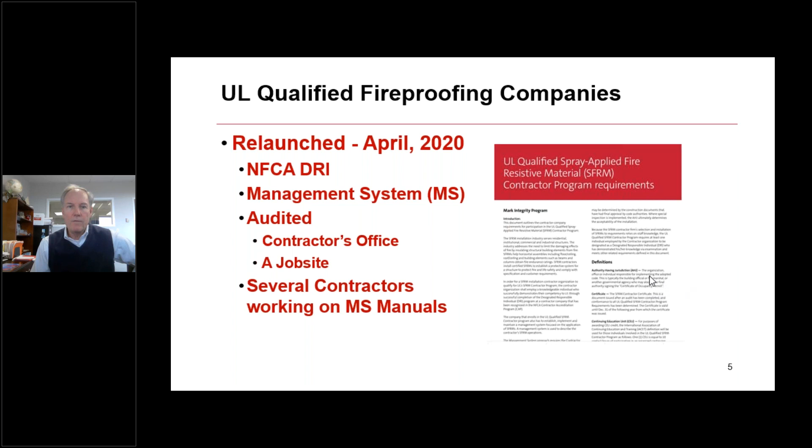The UL Qualified Fireproofing Contractor Program, the NFCA worked with UL to relaunch this right at the beginning of COVID, actually, if you think about it. April of 2020 is when we relaunched this. Contractors are in the queue, and there's a bunch of companies about ready to get qualified, and we look for that program to take off over the next several years.

The NFCA's Handbook of Accepted Fireproofing Knowledge supports the exams, the NFCA fireproofing exams for IFRM and SFRM. It's fireproofing all in one place. Great book. Rich Walke was a big help, helping me get it over the top and finished. We had developed a lot of the book, and over a period of, I don't know, 3-4 months, Rich and I were able to make it a public document and finish things off.

Moving on, our education exams continue at NFCA. We've got virtual education exams taking place November 9 to 11. So if you want to get educated and take the NFCA fireproofing exam, which is the first step to become a UL qualified fireproofing contractor, or the NFCA accredited fireproofing contractor. You know, that NFCA accredited fireproofing contractor program is the first step to get yourself to the UL program. Got to be a DRI. The only way you can be a DRI is if that NFCA accredited contractor company appoints you as such. So November 9 to 11, we'll be doing the education exams, and then we'll do them live at our NFCA Week of Learning in the spring of 2023.

Our Award of Excellence takes place at the conference next year. January 31 of 2023 is our deadline for the Award of Excellence. Look for more information on that to come in November, December as well.

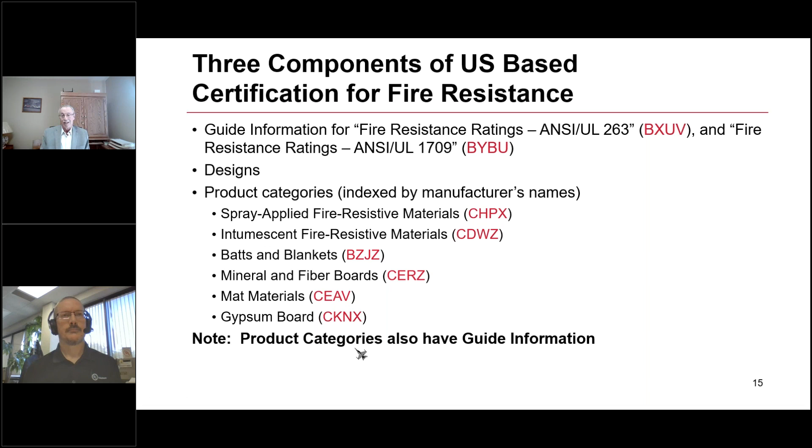And then when we come to Canadian certifications, we likewise have a series of product categories, each of which is described by a name and then the category control number. For the most part, the names of those product categories will end with the phrase certified for Canada to very clearly identify the fact these are certifications based on Canadian codes and Canadian standards. So anytime you see that phrase, it is purely Canadian work intended for use in Canada. The CCNs for Canada will end in either a 7 or a C.

You're probably asking, why do we have two suffixes for the Canadian work? Well, the categories which end in the number 7 are categories, listings, and certifications which are published by UL Solutions, I guess I'll say the parent company of UL. The categories that end in the letter C are published by Underwriters Laboratories of Canada, which is a Canadian affiliate of UL.

So at some point in time, those categories will be merged. UL has not yet got to that point of doing that, but in reality, either of the categories, the 7 categories or the C categories, relate to certifications intended for Canada. First case with a 7, those are certifications from UL, typically referred to as CUL listings, and those ending in the letter C are UL of Canada listings. So likewise with the various product categories, they'll either end with the 7 or the C suffix.

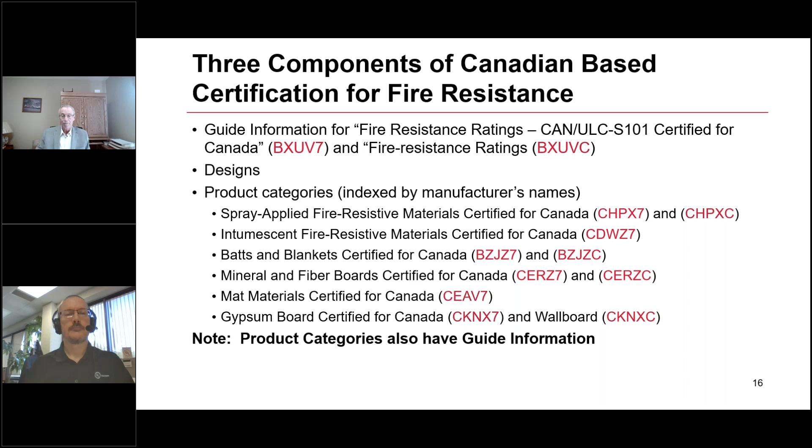So let's talk about each of those individual components of the certification information at this point. The guide information is our primary focus here today, and more specifically the guide information relating to BXUV fire resistance ratings to ANSI UL 263. And the guide information for BXUV is probably, if not the most complete guide information published by UL. Many, many pages long, lots of very informative information.

We used to have an index of that guide information, and there were something like 95 individual topics covered by this guide information. So it is imperative that you know the guide information is there, and you know how to use that information and how we use it in conjunction with the use of the individual designs. So in general terms, the guide information starts with the equipment, materials, and systems included in the category. And that applies across the board regardless of what the category is. Most of the time, the guide information will start with a sentence, this product category covers such and such. Very easy to understand whether you're in the right category just by reading that first line.

And then it includes intended uses, restrictions, and supplemental information that apply. And that's where BXUV is really useful. It contains pages and pages and items of intended uses, restrictions, and supplemental information. All the guide information also gives the standard by which those products are evaluated. That way you have a very quick way of keying in: are the listings I'm looking at appropriate for what I'm trying to do at this point in time?

So then, of course, each individual UL design is a specific construction which covers certain construction features and ultimately concludes with, if you build this assembly as described in the design, this is the hourly rating that you would achieve. And most all of the designs do have multiple options, so you do need to read all those options, all those variations. Sometimes those variations will impact the ratings, sometimes they won't, but you need to read that design carefully. And in case of direct applied fire resistant type materials, those designs will give you the thickness that's required for the required hourly rating for your project.

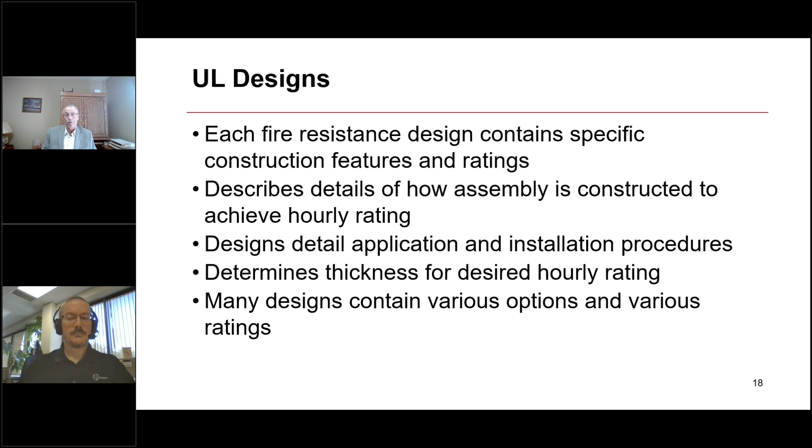And again, most designs contain a number of options and various ratings, so you need to read it carefully to understand exactly what that specific design is covering. And most UL designs are intended for a particular manufacturer. Not always. There are a lot of designs that do include multiple manufacturers. The UL designs are not interchangeable between products unless specifically noted in the design.

You can't take desirable features from one design, combine them with desirable features of another design, and come up with your hybrid. That sort of process is not allowed. You're required to use those designs as published. And there are a number of modifications that are permitted by the guide information. Those are permitted.

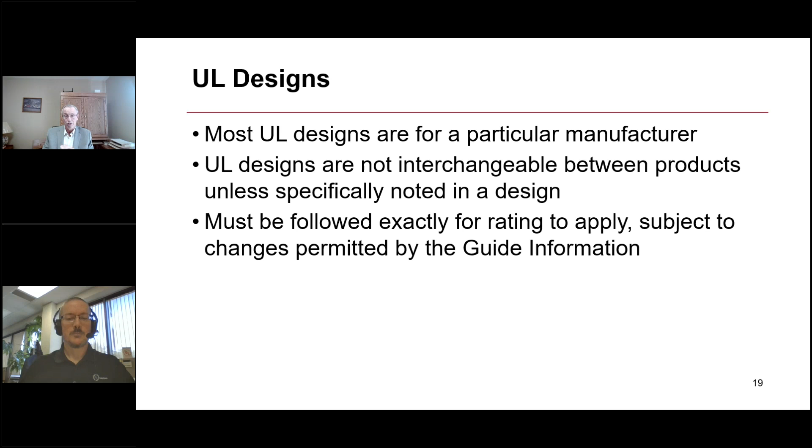And the classic example I always give in that particular case is, and perhaps doesn't pertain to your industry, but for example, if you're looking at a design that covers a gypsum board wood stud wall assembly, and the design says the wall is to be constructed of 2x4s, can you construct it with 2x6s? Well, by the design, the answer is no. But if you go over to the guide information, it will state that the stud size specified in the design is a minimum, and anything larger can be used. So that's a classic example of how the guide information can be used to modify the specific requirements of an individual design.

And of course, those designs are published under the UL Product IQ online directory, accessible through www.ul.com/PIQ. And Kevin will be talking more about that in a couple of minutes.

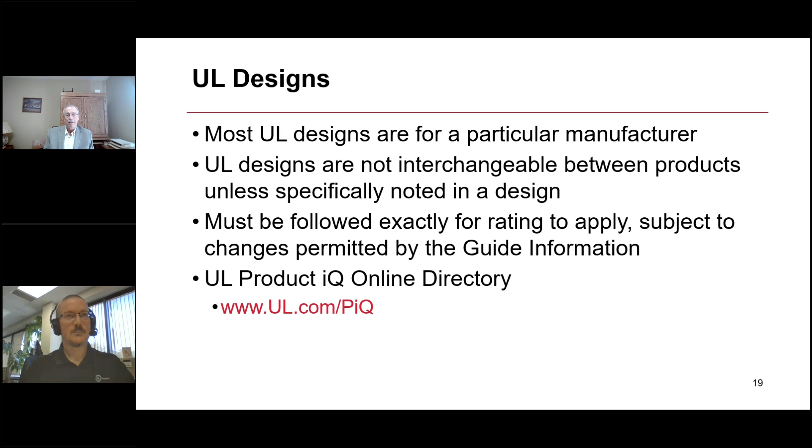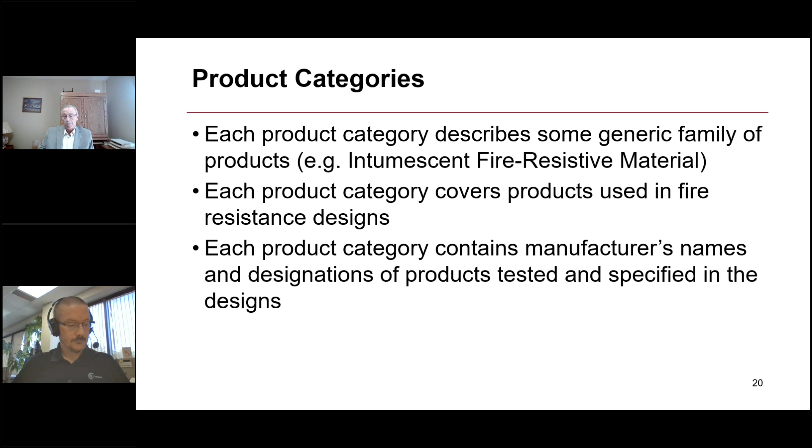And then the individual product categories describe some generic family of products, for example, intumescent fire-resistive materials. And then within that product category, we will have some guide information which pertains to the use of intumescent fire-resistant materials. And then it will cover the individual manufacturers who produce products that are certified by UL for use in these designs. And each product category will contain the name of the manufacturers and the designations of the products that have been tested, and then either the designs that those products can be used with, or some parameters by which that product can be used in conjunction with the designs. So a couple different formats there depending on the specific product category.

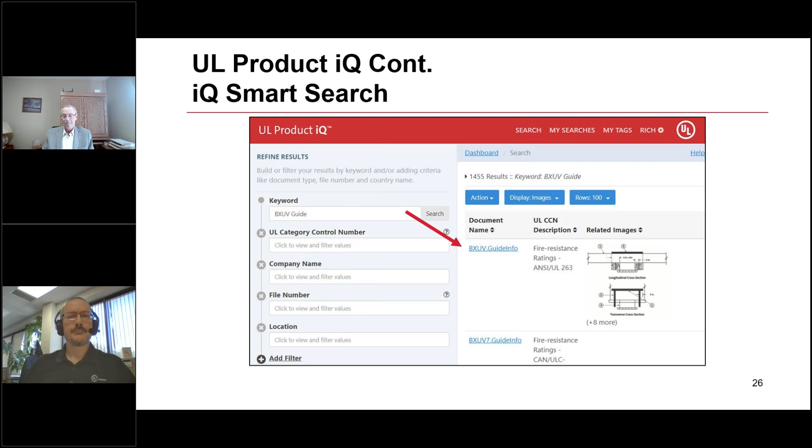And the next slide, yeah, here, this is what you'll see, the BXUV guide info. This is the most looked at thing on Product IQ. On all of Product IQ, this is the most looked at thing. I liken this to sort of not quite a building code, but as Rich described it, you can work with this BXUV guide and the designs to know what variations you can make or cannot make. It is the most looked at thing. If you pasted this into a Word document, it's 50 pages of text, so it's quite a bit of text. So next slide, please.

And maybe, Kevin, can I introduce one other comment? Sure, go ahead. The very first item of the BXUV guide is a table of contents of what is contained here. And these are links. So if you just click on any of those topics, it will take you directly to the page of the BXUV guide that discusses that particular topic. So it's a very useful tool for getting to what you specifically need. Otherwise, if you're trying to page through 50 pages of information, you would find it very difficult to find what you're looking for. Okay, go ahead, Kevin. Yep.

And yeah, so there's six main topics in the BXUV guide, one being introduction, two general stuff that applies to every type of assembly, whether it's a floor, beam, column, or wall, that would be in general. And then information that's specific to certain assemblies would be found under those assemblies, section 3, 4, 5, or 6. You go to the next slide. So in section 1, there is a table that gives letters and numbers. It gives an explanation of the design numbers, such as a wall design like U305. It tells you what those letters and numbers mean.

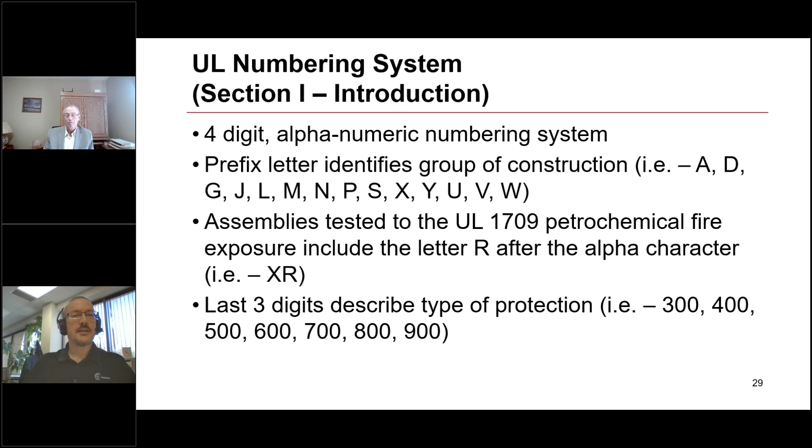Next slide, please. Okay, and as I mentioned, each of those letters signifies what type of assembly it is. So if the design starts with the letter N, that's a beam for a floor. If it's a wall, it would start with the letter U, V, or W, and so on. Next slide, please.

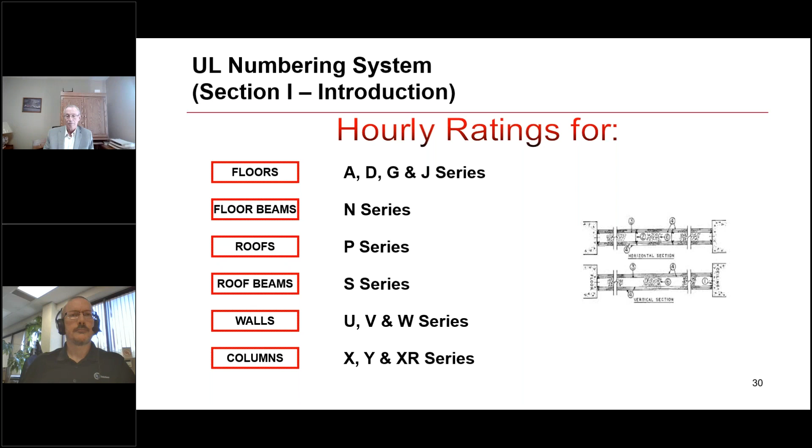And as I mentioned, the first character is the letter, and then the next 3 characters are numerical. There's 3 numbers. So if it's U300, actually, if it's a 600 series, it would be an intumescent coating. 700 or 800 series, it would be an SFRM. And the 900 series means it's an unprotected assembly. So those last 3 characters, the numbers, refer to the protection material.

Yeah, next slide. When Kevin says the 800 series, that really means design numbers 801 through 899. So it's a series of designs. Correct, thank you, Rich. So here are some examples spelled out. D700: that D refers to a floor, 700 refers to an SFRM. P800: P refers to a roof assembly, and the 800 again refers to an SFRM. And then the last example here, X600: the X refers to a column, and the 600 series, 601 through 699, means it's an intumescent fire resistive coating.

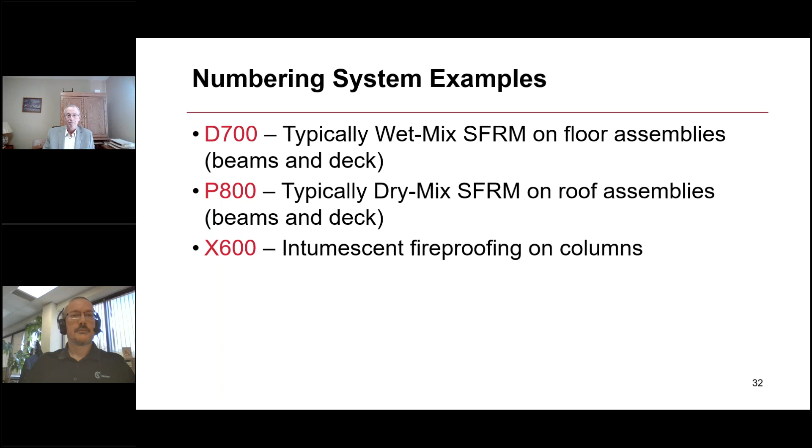So go to the next slide. Okay, Rich, back to you. Okay, great. Thank you, Kevin. Great job.

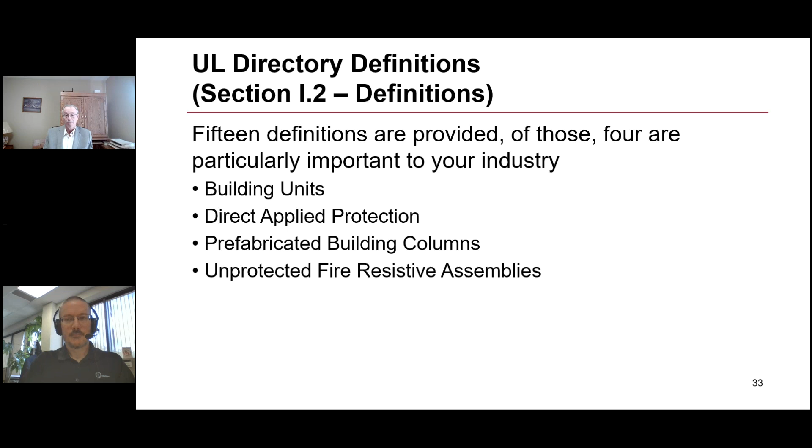So I'm going to continue talking about the information in the guide. This particular piece of information is found in section Roman numeral 1, the introductory information, and then the 2 refers to the fact it's the second item or paragraph within that introductory information. So you can always reference the pieces of information in the guide based on that table that Kevin showed you earlier. In reality, there are a number of definitions in the guide that pertain to fire resistance, and 4 of those are particularly important to your industry: building units, direct applied protection, prefabricated building columns, and unprotected assemblies. So let's look at those definitions.

A building unit is simply a particular type of product covered by a product category called building units, and typically it's some sort of manufactured composite panel product providing some sort of fire resistance rating. And then direct applied protection, folks are probably very familiar with that, but it describes various types of fire resistant materials, including sprayed, intumescent, mastic, and subliming type materials applied directly to the construction. For example, directly to the bottom of the steel deck, directly to the beams, etc. So that's the key. They're directly applied to the structure itself.

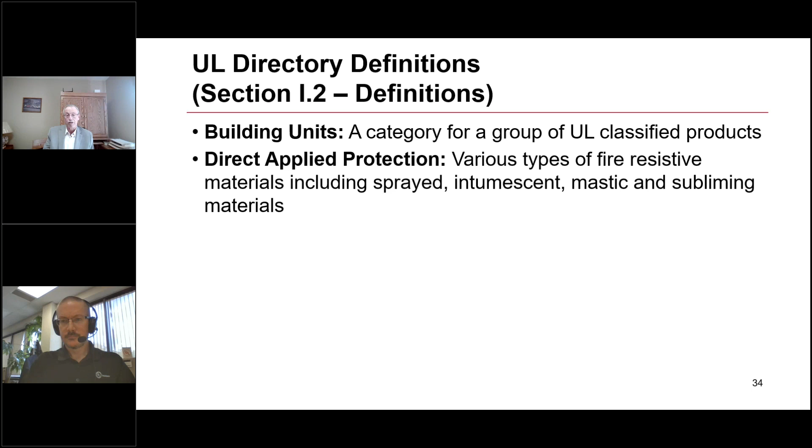And then we have prefabricated building columns, and those are structural building columns that include a fire resistant protection system when delivered to the construction site. For years, UL had a couple of designs that show a concrete encased column with a light gauge steel wrapping around it. I never knew too much about those products. They existed when I came into the fire resistance group at UL in 1987, but I actually ran across the manufacturer of those products recently, and they're out there in the field actively promoting that type of construction. So anyway, those are prefabricated building columns.

And then we have an unprotected fire resistive assembly. Now, that is perhaps a bit of a misnomer, because obviously we need some sort of protection on these assemblies in order to achieve the rating. What that's really referring to is assemblies where there is no direct applied coating or suspended ceiling to protect the general floor area or roof area of that assembly. Even though it's referred to as an unprotected assembly, typically those assemblies will have some sort of protection applied to the structural elements, the beams, joists, and so on, in most cases some sort of direct applied material. But the bottom line is that unprotected refers to the protection on the deck itself.

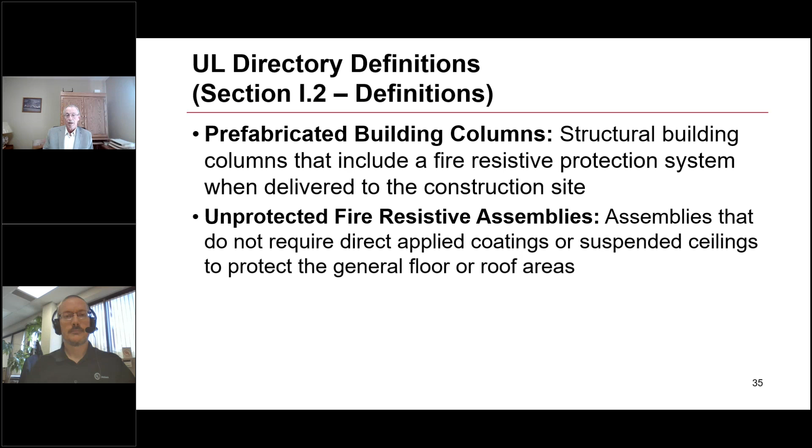And now moving on to section 2, or Roman numeral 2, that covers general information that's applicable to all of the various designs. And there's several pieces of information that would be important to you folks. One of them is reference to interior and exterior applications. And then the next would be information about the coating materials, both the spray applied fire resistant materials and intumescent fire resistant materials. Now, UL refers to the sprayed materials as spray applied fire resistant materials.

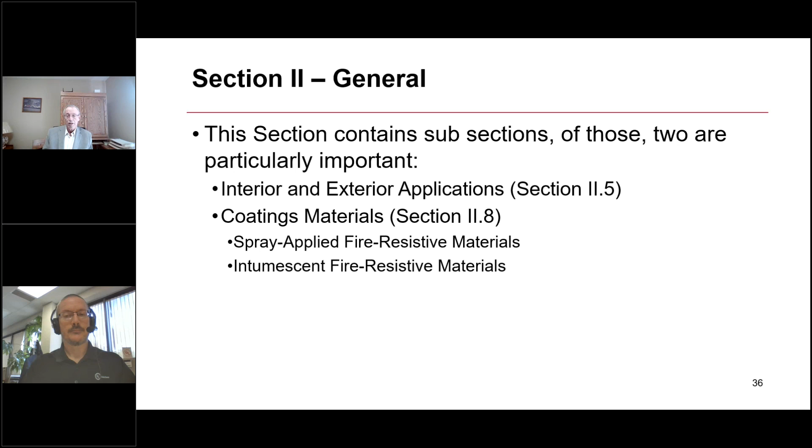So your industry typically uses the phrase sprayed fire resistant materials. And Bill and I were also successful in getting ICC's International Building Code updated to reference these as sprayed fire resistant materials. So now Bill and I are working with Kevin to get the UL listings updated to also use that industry terminology of sprayed fire resistant materials. So that will happen at some point in the future. So anyway, let's look at the interior and exterior applications.

Again, that's covered under Roman numeral 2, general, and then item number 5 under Roman numeral 2. So basically what this says is the fire resistant designs and certified materials are investigated with the understanding their use is limited to interior applications unless otherwise specified in the design or certification information. And typically the form that reference will follow is the phrase investigated for exterior use in conjunction with the description of the specific product that was used to provide the protection. So list the manufacturer, the designation of the product, along with that phrase investigated for exterior use.

What that implies is that UL has done a series of tests to evaluate that material will still provide its fire resistant performance after exposed to various elements that would be anticipated in an exterior application. The UL guide information also at one point in time used to contain a phrase, or unless otherwise obvious. For example, let's say we're looking at a wall assembly or a roof assembly, and that wall assembly contains exterior siding products on the exterior side of that wall. Is that design acceptable for use as an exterior wall? Realistically, the answer is yes. Otherwise, it wouldn't reference the exterior siding, for example.

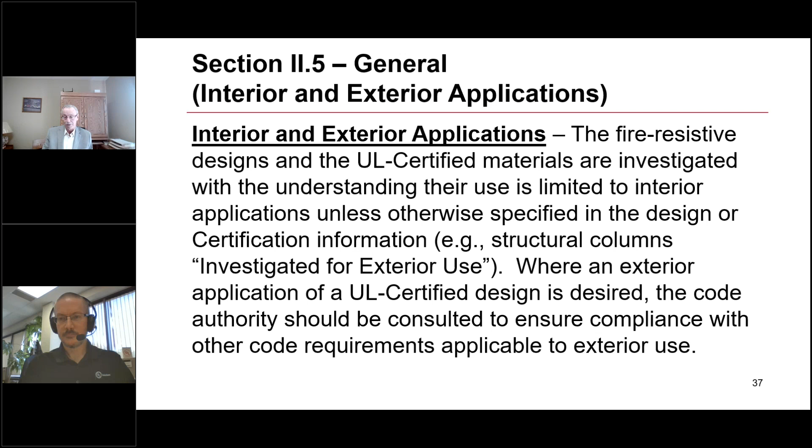So next item we'll want to talk about is covered under Roman numeral 2, general, item number 8, and that covers coating materials, your typical spray applied fire resistant materials and intumescent fire resistant materials. And one of the big topics under that section is how do we address the situation where you have an unknown primer applied to the structural steel. So the question has always been, will the sprayed fire resistant materials adhere to that unknown primer? And this was a huge deal when I first came into the UL Fire Resistance Group in 1987, and the industry was struggling on how to address this issue.

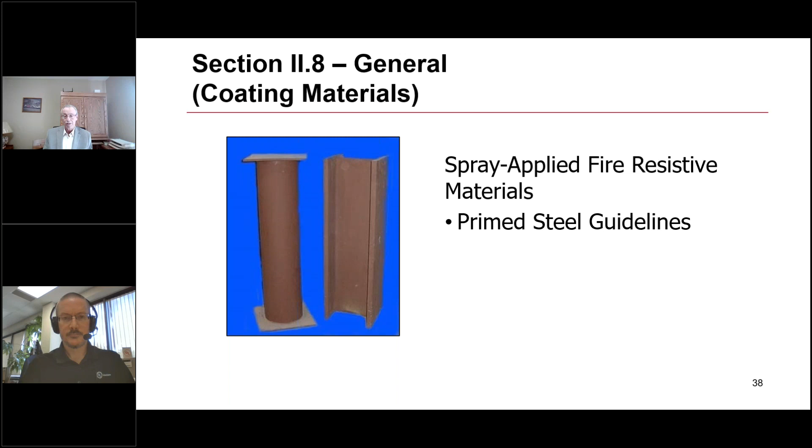So UL hosted a series of task group meetings with the manufacturers of the sprayed fire resistant materials, along with the manufacturers of the coating materials, and put together the thought processes and did a little bit of research, and ultimately came up with a series of guidelines on how to address that situation where, as a contractor, you show up in the field and you find that the steel is primed. You have no idea what that primer is. You have no idea whether your sprayed material you're going to be using will adhere to that primer. So you scratch your head like this gentleman's doing and say, now what do I do?

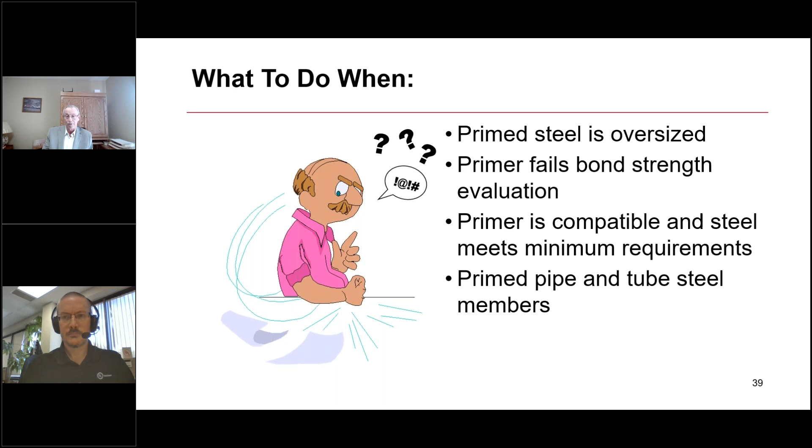What do you do when that primed steel is oversized? What if you fail a bond strength test? There's a whole series of rules and requirements that come into play here, which I'll explain as we go along. But one of the requirements says that if the size of the structural element is small, relatively speaking, then the material itself will adhere to itself and have enough cohesion strength that it will stay in place even if it loses some of its bond strength adherence to the steel. So the requirements really relate to what is the size of the structural steel elements.

And for a beam, the limitation is the flange width shall not exceed 12 inches. For a column, that flange width shall not exceed 16 inches. And then for a column or a beam, the web depth shall not exceed 16 inches.

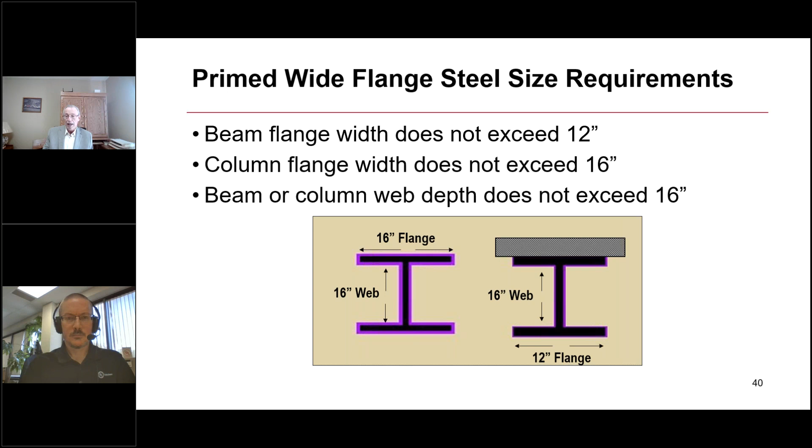And there's an added bond strength requirement also, but we'll get to that one in a minute. If the size of your steel members is larger than those dimensions I just gave you, then it's required that the structural element be protected with strips of lath or studs and discs applied to the structural member for a minimum of 25% of the size of the oversized flange or web. That lath width shall not be less than 3.5 inches, and that lath needs to be welded, screwed, or attached with powder-actuated fasteners at a maximum of 12-inch centers to the structural element.

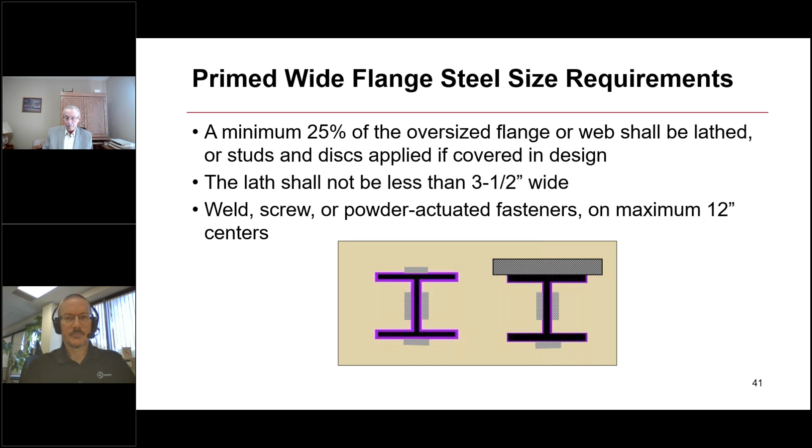So basically, you're providing a mechanical bond within that oversized dimension to provide some adherence for the spray-applied fire resistant materials. And if you have a tube, steel, or pipe, the dimensions would be for a tube width that does not exceed 12 inches, and a pipe outer diameter that does not exceed 12 inches.

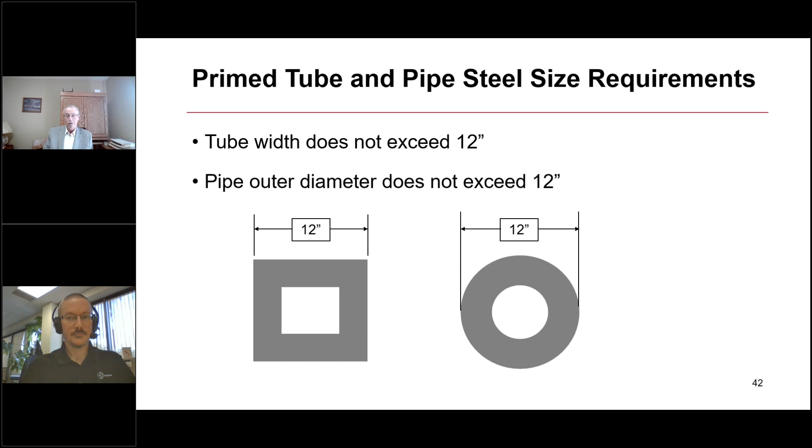What happens if it does exceed those dimensions? Well, then you need to apply again the lath or the studs and discs to provide that mechanical adherence of the fireproofing material to the structural elements. And once again, the width of that lath strip shall be no less than 3.5 inches, and the clear span of the pipe or tube shall not exceed 12 inches.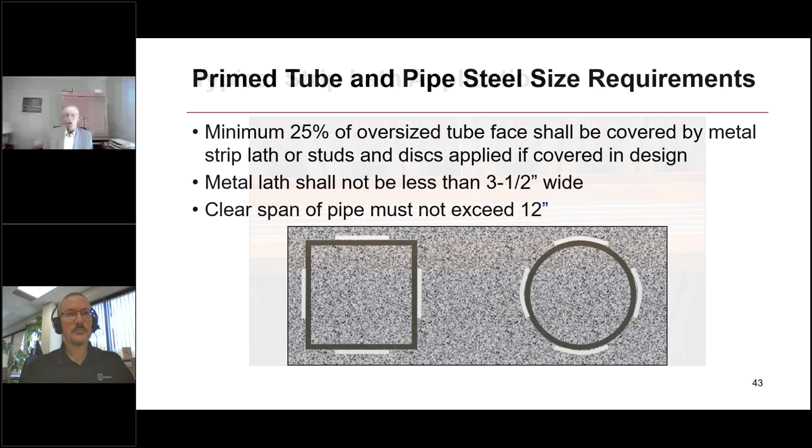So here's a photo of an application of lath. In this particular case, this beam was oversized, and as such, lath was required. Strips of lath have been applied to the web section, and that provides adherence for the fireproofing. Now, the second requirement to use hand in hand with those dimensions that we've just gone over is a bond strength test.

If you have an unknown primer, you need to conduct bond strength tests of the spray-applied material as applied to that primed steel. The results of testing in accordance with ASTM E736 should indicate a minimum average bond strength of 80% and a minimum individual bond strength of 50% when compared to the bond strength of that same material applied to a clean, uncoated 1/8-inch thick steel plate. In other words, a control sample. The average and minimum bond strength values shall be determined based upon a minimum of 5 bond strength tests.

Now, if you do not meet your bond strength requirements of 50% and 80%, then you can use a bonding agent to meet that requirement. If you meet the strength requirements with the bonding agent, then you're good to go. If it's not met, even with that bonding agent, then you need to provide a mechanical bond by wrapping the entire outside perimeter of the structural element with an expanded metal lath. The guide information will give you more details on how to do that, the specifications on the metal lath, and so on and so forth.

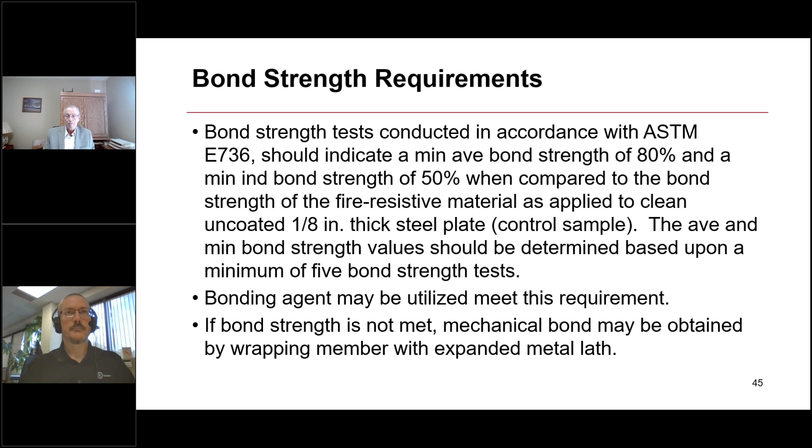So at this point in time, I'm going to turn the floor over to Kevin, and Kevin is going to talk about intumescent fire-resistant materials. So go ahead, Kevin. All right. Thanks, Rich. You can go to the next slide.

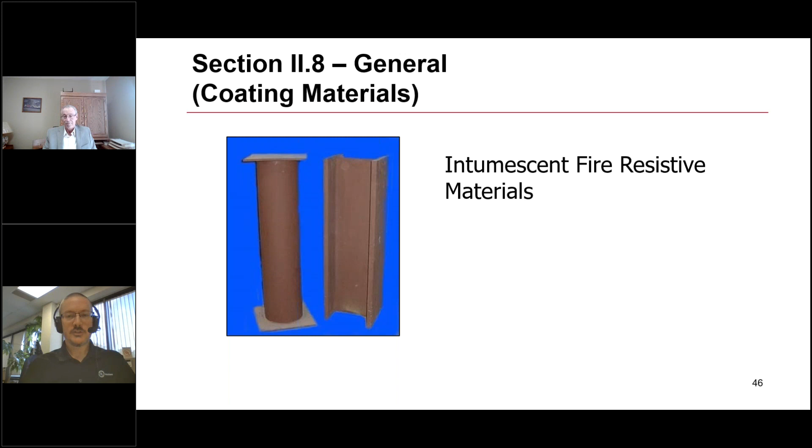So there it talks about thickness, how to measure the thickness, and determine the right thickness on the column or beam, the structural member in the field. When we test columns and beams in the lab, maybe on a 9-foot column or a 13-foot long beam, we take maybe 80 or 100 readings here in the lab to ensure that that coating thickness is uniform, so we know what we're testing. But do you have to measure it that many times in the field?

No. So the BXUV guide says, for the thickness that's in those designs, the column design or the beam design, use the AWCI Technical Manual 12B, standard practice for the testing and inspection of field-applied thin film intumescent fire resistant materials. In there, there's a method, I think it's based on the total square area at the job site, for how many readings to take. So that's what the guide information says about the thickness that's published in the design. Use the AWCI manual to determine how many readings to take at the actual job site to ensure that the right thickness of intumescent material is on the column or beam.

Another important point with intumescent materials, the guide says you cannot extrapolate the element size, the beam or column size, or the material thickness. Next slide, please.

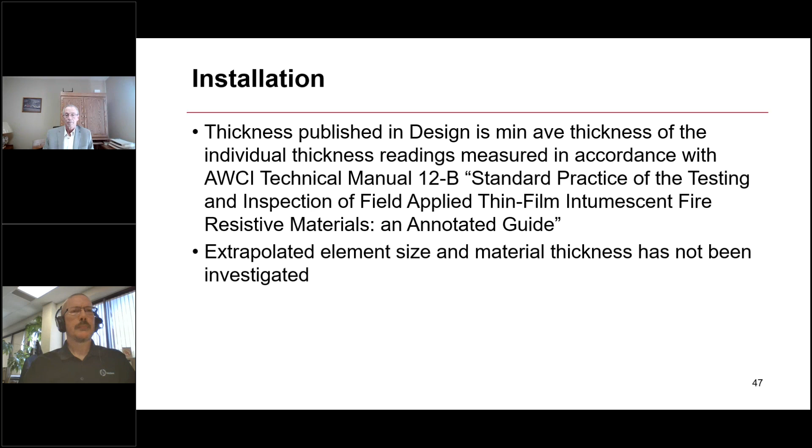Okay, and part of the reason for that last statement and then this next one up here is with intumescent coatings, how they perform. They form when those thin paint coatings see fire, see heat at a certain temperature, the coating starts to expand and form a char, an insulating char, and that's what protects the steel beam, the steel column. It insulates it from the fire, keeps the steel temperatures low up to a certain point.

But what can happen with intumescent coatings, you might think, oh, the more material I put on, the better. Well, some coatings might have a limitation that if you put more of the material on than what is tested, that might actually be bad, because if that char gets too big or too much, gravity then might come in and actually start to pull that off, and you might have a lower rating than what you originally had with that lesser thickness. So that's why that previous statement says do not extrapolate the thicknesses.

And then here it says the average thickness should not exceed the maximum thickness published in the individual design. What that means is that the maximum thickness in that individual design is the maximum thickness that we have a test data point on, so do not exceed that. And then at the other end, you don't want to go too low, so it says no individual thickness measurement should be less than 80% of the thickness specified in the design. So you really need to be close to what the thickness is stated in the design.

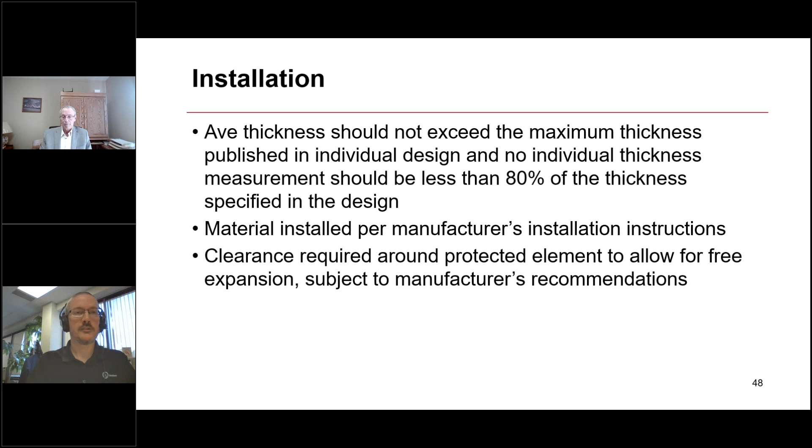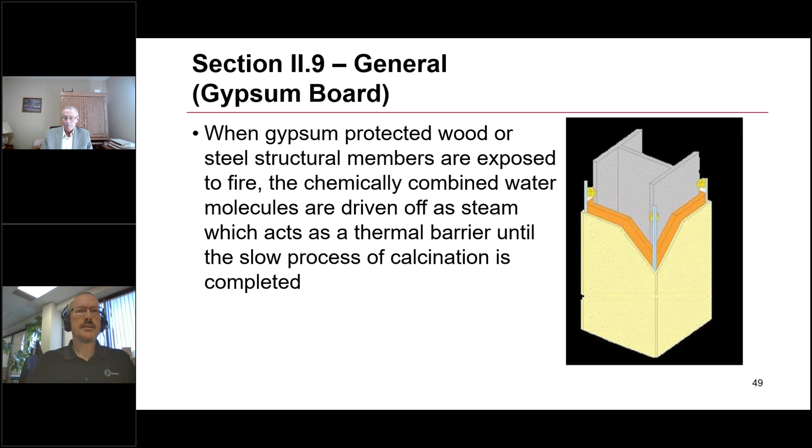Okay, next, section 2.9 talks about gypsum board. Gypsum board is also a very good fire-resistant material when it's used on wood or structural steel members and it's exposed to fire. There's chemically, water is in the gypsum board in a chemical crystal form that when the fire or heat hits that gypsum board, the fire and heat first go to driving that water out as steam. So then the gypsum board acts as a thermal barrier until that process, that it's called calcination, until that process is completed.

Kevin, before you go ahead, I'll just say that I once did some calculations, just a little piece of trivia. Each 4x8 sheet of 5/8 inch thick gypsum board contains 1.86 gallons of chemically bound water. Hard to imagine, but that's what the numbers work out to be. Go ahead, Kevin. How long did it take you to do that calc, Rich? 30 seconds. Really? Okay, cool.

All right. Okay. So there's kind of like two general types of gypsum board, type X and type C. We'll first talk about type X. It was introduced in the 1950s. What does type X mean? Where is that defined? That's defined in an ASTM standard C1396.

And one of the definitions for type X says that if you take 2x4 wood studs and put one layer of 5/8 gypsum board on either side of that wood stud, there's a certain nail pattern, certain type of nail, and you subject that to the UL 263 ASTM E119 fire test, and if that achieves a 1 hour rating, then that 5/8 board can be called type X. Its primary use is in walls, used in 1 through 4 layers.

It is in some ceiling designs, but typically you cannot put insulation on top or on the back of the gypsum board in the ceiling plenum, because under fire conditions, the heat's on the underside of that ceiling, and if you have insulation on top of the board, that's kind of trapping the heat there, and it will accelerate that calcination process, that degradation process. So there's some limitations to the performance of type X boards. All right, next slide.

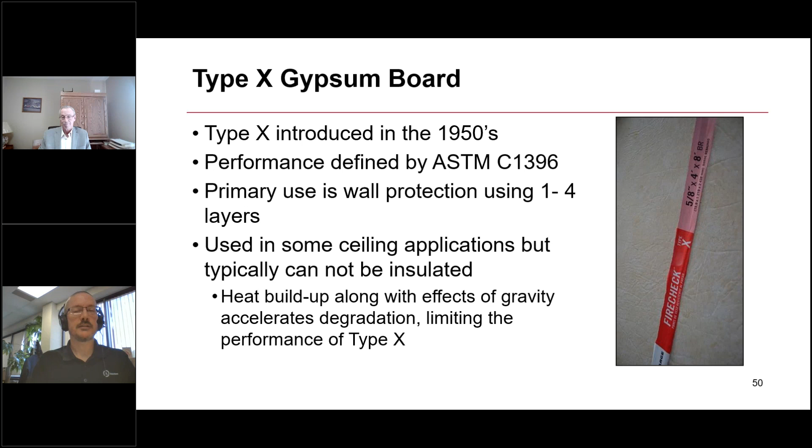All right, thank you. And then the other type is type C gypsum board. That's not really defined anywhere in the ASTM. Maybe someday it will, but it was first introduced by USG in the early 1960s, and then later on in the 1980s, other manufacturers started making their own version of a Type C board.

What makes it different than Type X board is Type C boards contain a special core formulation that compensates for the shrinkage, that calcination that we're talking about. There's some special ingredients there that make up for that to reduce the effects of shrinkage. This board has become the norm for many column, beam, roof, and floor ceiling assemblies. What you just have to do is look in each design, and it will state the manufacturer and type of board, type designation, model name of the board allowed in that design.

A very common misapplication of this is if the design calls for a Type C board and a Type X board is actually used. That would not be allowed unless that Type X board is specified in the design. And the reason for that is, as we're showing on the screen here, the Type C boards tend to perform better because of that different core formulation, different weight. So if Type C board is the only type specified in the design, that is the one that you have to use.

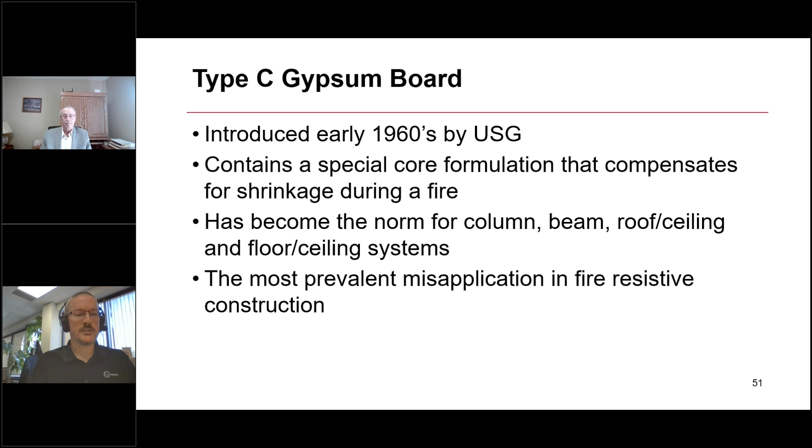Okay, next slide. Okay, and then maybe the last thing in this section, general, I think Rich mentioned this earlier. This is stated at the very top of the BXUV guide. Fire resistance ratings apply only to assemblies in their entirety. You're not really allowed, other than beam substitution, which Rich will talk about in a bit. Other than that, you can't look at one design and move something from that design over to another.

Another thing, what this means is that no specific material in the design has a rating. Like there's really no such thing as 1 hour rated gypsum board or 1 hour rated plaster or a fire rated nail. Although those things might be tested in a fire resistance assembly, and are a part of that, the rating applies only to the assembly, not the individual materials. Okay, next slide.

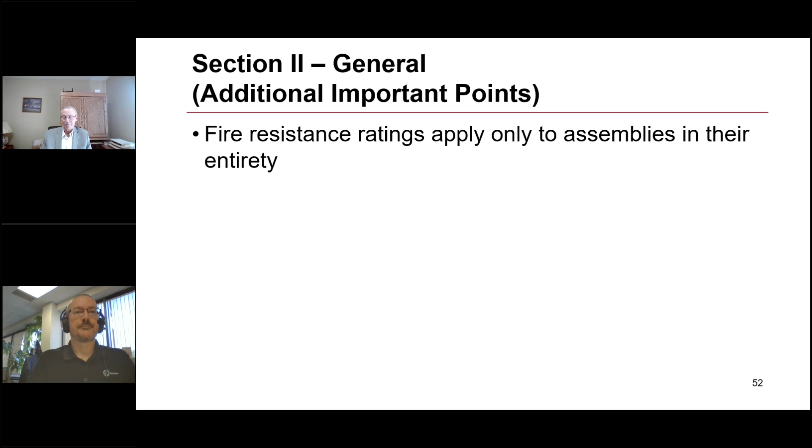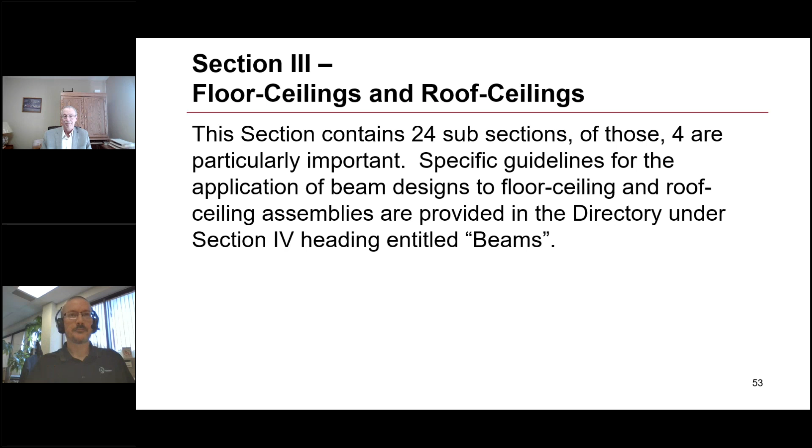Okay, so let's move on to section 3 for floor and roof ceilings. This has 24 subsections, and we'll talk about 4 of those. You can go to the next one, Rich. Okay, so those 4 we'll hit on today are concrete, steel floor and form units or steel deck, steel joists, and the deep end of the pool, restrained and unrestrained assemblies. Next slide, Rich.

Okay, what the BXUV guide talks about concrete, section 3.1, it makes a general reference that there's 2 types of concrete in all the designs, normal weight and lightweight concrete, kind of defined by the densities there, normal weight having the higher density, lightweight having a density there of 90 to 120 pounds per cubic foot. So each design will state a minimum compressive strength, and generally that's the compressive strength of the concrete that was used in that fire test. And there is some data to show that the compressive strength is somewhat tied to the hourly rating. So that's why it's specified there.

But the BXUV guide does allow a little bit of tolerance there. It says you can reduce that concrete compressive strength that's specified in the design by 500 PSI to obtain the minimum value. Also, the dry unit density of the concrete is also specified in the design. Again, that's linked with the fire resistance rating thermally, and the BXUV guide. Sometimes the engineer might have just put a number in there as a density, and what the BXUV guide is saying, that number has a tolerance of 3 PCF unless the design states otherwise.

And then the last thing is key. Sometimes the design will have normal weight and lightweight concrete and specify what thickness is needed for either one. But if the design only has lightweight concrete, you cannot just interchange that with normal weight concrete because they behave differently. Normal weight concrete in a fire test acts as a heat sink, kind of absorbs the heat, and lightweight concrete in a test tends to reflect the heat. So if this concrete is on top of a beam, that will cause the temperatures on the top flange of that beam to react differently depending on which type is there. So when lightweight concrete is specified, the use of normal weight is not allowed, and also vice versa. If normal weight concrete is the only one specified, you cannot use lightweight concrete.

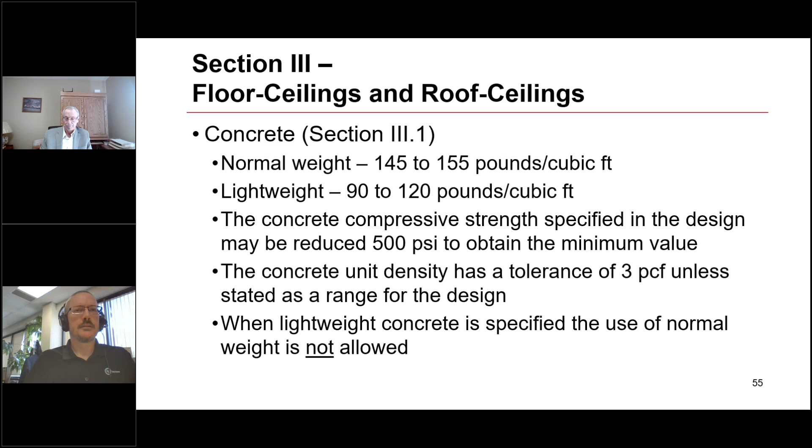All right, so that's concrete. Next slide, Rich. All right, steel floor and form units are just steel deck.

Key thing here is that the type of unit and the minimum steel thickness are specified in each design. So there's quite a few different types of deck. There's roof deck, there's corrugated deck, fluted deck, cellular deck. Again, if the design calls for fluted deck, but the builder wants to use cellular deck, there's some implications with that.

Again, with that top flange of that beam, when you have cellular deck, then there's no access to that top flange to protect that. So will that heat up faster? So you have to pay attention to the design, and whatever type of deck is called out, you have to use that. All right, next slide, Rich.

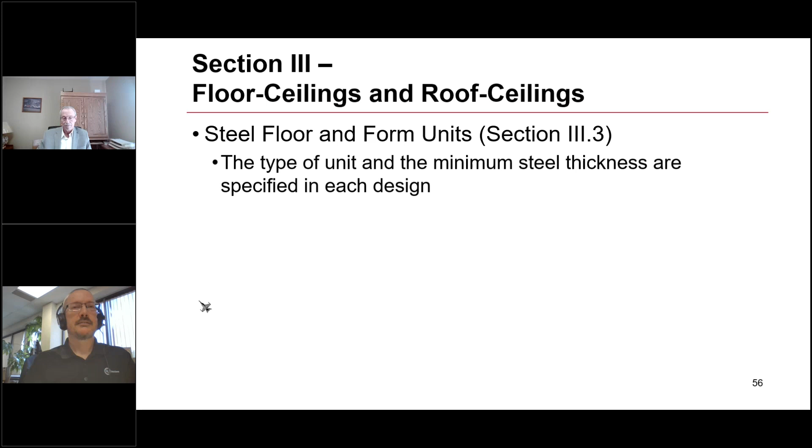Not sure why that's not advancing. Okay, the next one should be steel joists. There we go.

Okay, section 3.7 is about steel joists. Some designs will call out a specific type, like a 10K1 joist. That would be the minimum size, but other designs give a minimum depth and a minimum weight per foot. So what this is saying here is that is considered the minimum size. You can use that size or anything larger when you consider both the depth and the minimum weight per foot. That's based on the mass of the steel, which we'll get into in a little bit.

Also with steel joists, for designs that require the bottom chords of the joist to consist of round bars, the substitution of angles of an equivalent area is not permitted. I think the reason for that is that bottom chord might be the one seeing the most stress, because these tests are loaded. The standard says you have to build these full scale and subject them to a load if it's a load bearing assembly. So anything with the joist is a load bearing assembly. And when you load that, that stress, I think, is mostly picked up by that bottom chord. So that's why that statement is there, that you can't substitute that.

And then also when the design calls for bridging bars or angles for the joists, and those joists have SFRM on them, if those joists are protected, you also have to put that protection material on those bridging bars and angles 12 inches beyond the joist. Next slide, Rich.

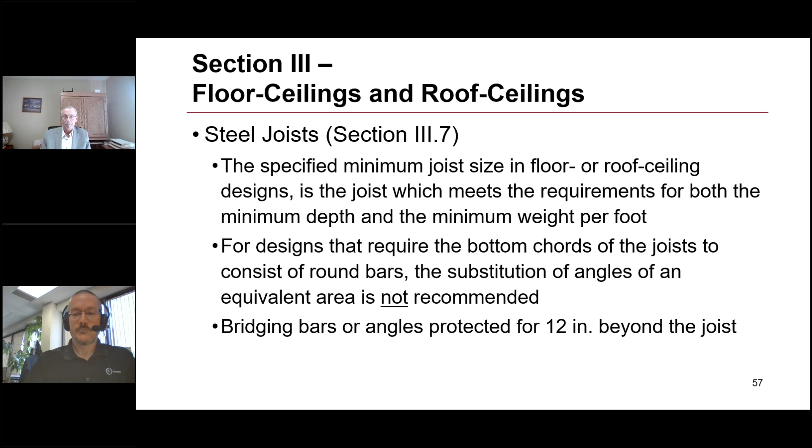Okay, restrained and unrestrained ratings. All right, the deep end of the fire resistance pool. So the guide information says that it's up to the designer and the code authority to determine if the assembly is restrained or unrestrained. Each design has restrained and unrestrained thicknesses in them in general, and it's tied to certain ratings. So what's to decide which one you use, restrained or unrestrained? The BXUV guide says it's up to the designer or the code authority to determine if the assembly in the field is restrained or unrestrained. If that's unknown or undetermined, the BXUV guide also says the unrestrained assembly ratings, because those conditions are more onerous. The unrestrained assembly rating may be used for either the restrained or unrestrained condition.

Next slide, please. Kevin, let me add one more point too. The International Building Code also has requirements for the decision on restrained versus unrestrained. The code basically says that unrestrained ratings are to be utilized unless satisfactory information is provided to the code authority to demonstrate that the assembly qualifies for a restrained rating in accordance with ASTM E119 or UL 263. So that puts the responsibility on a design professional to provide the evidence to the code official that the assembly is in fact restrained or not.

Okay, and to determine that, there's generally two ways to do that. The first one says that the structural engineer, the engineer of record, can calculate the relative stiffness of the surrounding structure and compare that to the stiffness of the UL test frame. That's the concrete and steel frames that we have here in our lab that floors and beams are tested in. So someone years ago did a calculation on these test frames. They're all built the same way. I think we've had them since the 50s and 60s, the same ones. We published that as a point of comparison. So the stiffness numbers are in the BXUV guide.

So if that calculated stiffness is greater than the stiffness of the UL test frame, that can be considered restrained. But if that calculated thickness, stiffness is less than those numbers in the BXUV guide, it is considered unrestrained. That's the first way. The other way is in UL 263 and ASTM E119 and also the BXUV guide, they all contain pretty much the same table that has given construction parameters, conditions for floors, for beams, etc. And if you look up what type of construction you have or what situation you have, what's the surrounding structure, it'll tell you if that is restrained or unrestrained.

Okay, great. Thank you, Kevin. And so I'm going to talk about the differentiation between beam ratings versus assembly ratings. And UL does publish two series of beam designs, beams intended for floor applications and beams intended for roof applications. And there's two purposes of those designs, the N series for floors, S series for roofs.

And the first application is where the code only requires a rating on the structural member. And certainly there are applications where that is the case, or sometimes there's applications where the code has a longer rating requirement for the beams and joists as compared to the rating of the overall assembly. And in that case, we can use the beam designs to replace the beam that is specified in the fire resistance rated floor ceiling or roof ceiling. For example, if you have a 2-hour assembly rating in that floor ceiling or roof ceiling design, and the code says we need a 3-hour beam with a 2-hour floor rating, we can replace that beam specified in the floor ceiling or roof ceiling assembly with a beam only design that has a 3-hour rating.

So there's some rules and methods by which we can make those substitutions. We need to follow those rules very carefully. And they're another one of those difficult concepts perhaps to follow, like restrained versus unrestrained. But in any case, I'll give you some of the guidance on how to make that substitution. And the guide information also says beams need to be defined based on the W, M or S-shaped structural steel as defined by AISC. And section 4, the guide information, item 1, talks about the minimum beam size is always defined by W/D ratio.

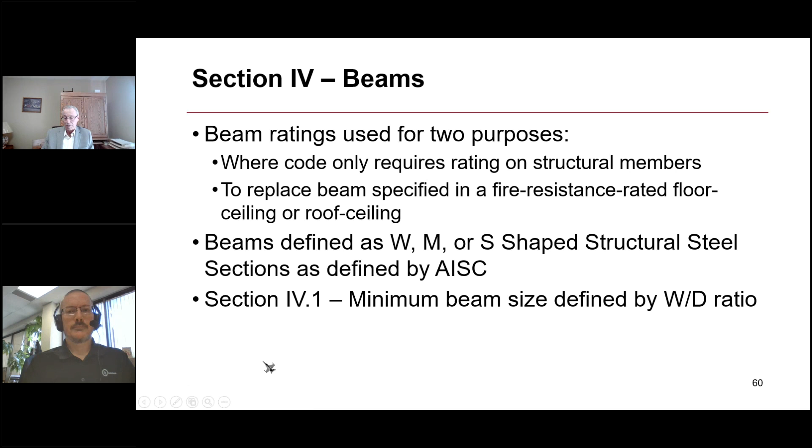And basically, W/D defines the massivity of that piece of steel. In other words, how much weight it has per unit length based on the heated perimeter. W is the weight, D is that heated perimeter factor. So each size beam has, or column for that matter, also has a specific W/D number associated with it.

Now, when you're using beams in conjunction with steel deck floor assemblies, then you have that cavity that is created above the top flange of the beam and beneath the steel deck, that trapezoidal shaped cavity, and that needs to be protected in some way, shape, or form. It's basically protected in one of two ways, either based on the use of the sprayed fire resistant material that's being applied to the beam and/or the deck, or you can use that same fire-resistant material in conjunction with the mineral wool. And the guide gives a couple different ways by which to do that.

So if the flange width is less than 8 inches, you fill the entire width of the flange with either spray applied material or spray applied material in conjunction with mineral wool. If the flange width is greater than 8 inches, then you can protect it for a depth of 4 inches from each of the two sides of that beam. So that's covered in detail in the guide information. And then we have those beam substitution procedures, which I talked about before. And again, the N series designs cover beams only, and those beams are intended for use with floor assemblies. Those floor beams can be substituted into the specific A, D, G, or J series floor ceiling assemblies, subject to a very specific set of rules.

And overall, one of those rules is the beam rating of the N series design must be equal to or greater than the assembly rating of the floor ceiling assembly. Obviously, if the floor ceiling assembly is rated for 3 hours, the beam is rated for 2 hours, it's not going to work. The beam is going to lose its structural integrity, causing the overall assembly to lose its structural integrity also. So the beam rating always has to be equal or greater than the assembly rating. Likewise, if you're dealing with roof assemblies, you can substitute an S series design for the specific beam covered in the P series roof ceiling designs. Again, subject to that rule where the rating of the S series beams should be equal or greater than the assembly rating of the roof assembly.

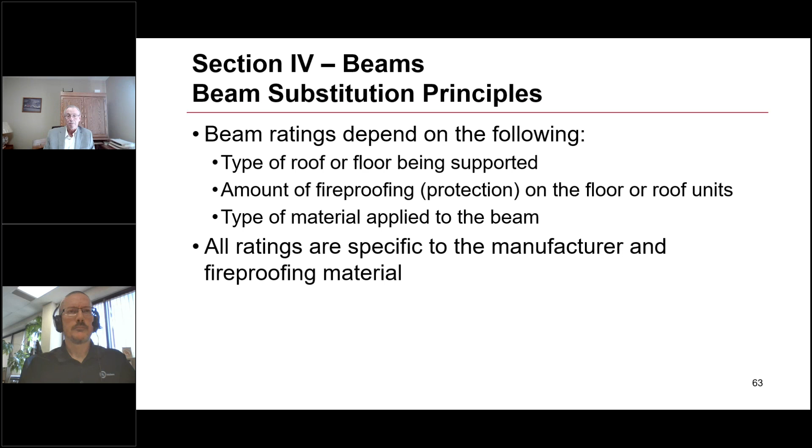And continuing on, the substitution really relates to the type of roof or floor being supported, the amount of fireproofing or protection on the floor or roof units, and the type of material applied to the beam. And all ratings are specific to the manufacturer and the fireproofing materials. So the UL guide information has some requirements for that beam substitution.

And one of the requirements is the substitution of beams into a floor or roof assembly should be limited to assemblies which have a similar or greater capacity for heat dissipation from the beam as compared to the capacity of the design from which the beam is transferred. In other words, you need to have more heat capacity in the assembly as compared to the beam only design.

And the idea behind that is, the concrete acts as a heat sink. It keeps the top flange of the beam cooler. So the more concrete you have, the better that beam is going to perform and the longer its rating is going to be. So you're limited to substituting that beam only design into assemblies which have a greater or equal capacity for heat dissipation. And I'm calling this a beam substitution rule, but in reality, that rule applies to not only beams, but also joists and trusses.

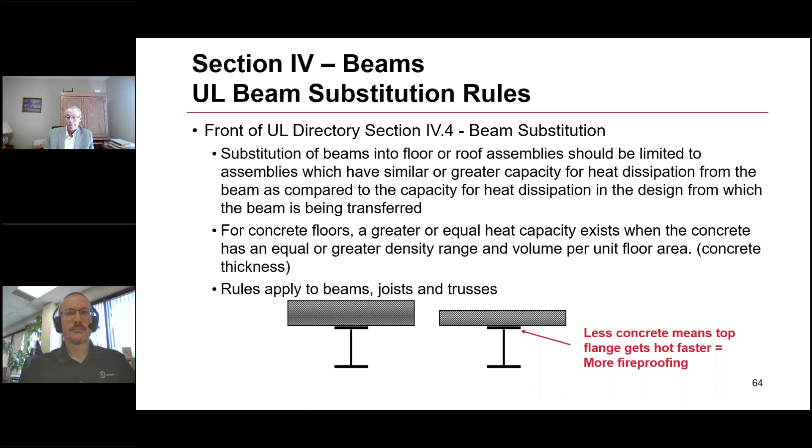And again, less concrete on the top of that flange means the flange gets hotter quicker, and as such, the beam would require more fireproofing material to reach a particular rating period. So here's a series of graphical representations of how we can make those substitutions. And this information comes directly from the NFCA Handbook of Fireproofing Knowledge. That manual has a very detailed description of the processes that I am describing now. These illustrations are coming from that document.

So after the webinar, if you want to get more details, strongly suggest you go to the handbook and review that in more detail. It'll provide more information than we can provide in a 1-hour webinar. So let's look at those substitutions. On the left-hand column, I have the full construction assembly. In other words, the P design, the floor assembly is either an A, D, G, or J series. And on the right, we have those partial construction beam only designs. The handbook calls these things partial constructions. UL calls them beam only designs, but they're all one and the same.

So the first item, can you substitute an S series beam only design into a P series roof assembly? The answer is yes, you can. Can you substitute an N series design into an A, D, G, or J series floor ceiling assembly? Yes, likewise you can. Can you take a beam from a P-series overall assembly rating, substitute it and create an S-series design? No, that wouldn't be appropriate, nor would it realistically ever be necessary. Likewise, for the floor beams, you can't create a floor beam design based on your floor assembly rating.

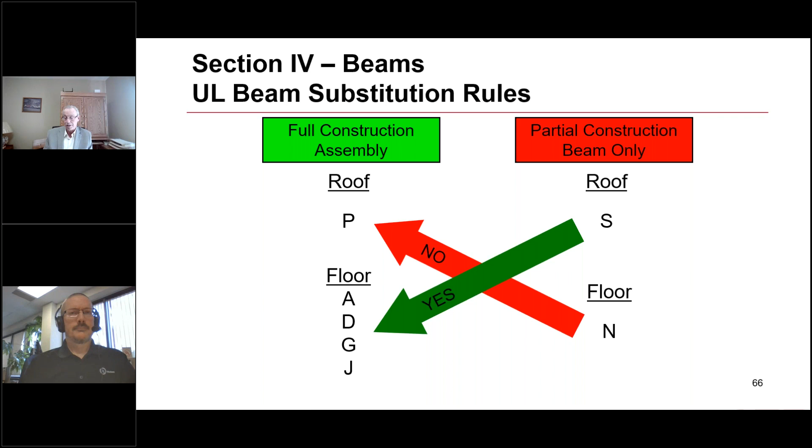If you have a roof assembly, those beams are typically tested with some sort of roof insulation, for example. Can that be used in a concrete floor assembly? Yes, because the floor has more capacity for that heat dissipation. Can you substitute a floor beam into a roof assembly? The answer is no, for the opposite of what I just explained. The roof has less capacity for heat dissipation, so that substitution could not be made.

So now let's address the question of protected deck versus an unprotected deck in terms of how it relates to this beam substitution rules. A protected deck assembly may be substituted by a protected beam design. In other words, you can take a beam design that was tested with a protected deck and substitute it into a protected deck assembly. Likewise, if you have an unprotected deck beam only design, you can substitute that into an unprotected deck assembly.

Next scenario, if you have an unprotected deck beam, you can substitute that into a protected deck assembly. And the reason for that is that protection on the deck is going to minimize the heat transfer from the deck into the top flange of the beam. So that substitution would be acceptable. And then likewise, you can substitute a protected deck beam only design into an unprotected deck assembly. Let's see.

But if you do that, you need to protect the deck for a distance of 12 inches away from each side of the beam to the same thickness as required by the beam. In other words, going back to that heat transfer concept, if you have tested the beam with a protected deck, if you substitute it in an unprotected deck, in theory, you have heat transfer from the deck into the top flange of the beam, so that substitution would not be appropriate. Therefore, the requirement is in place that if you need to do that for whatever reason, you can do it, but you need to protect the deck for a distance of 12 inches from either side of the beam.

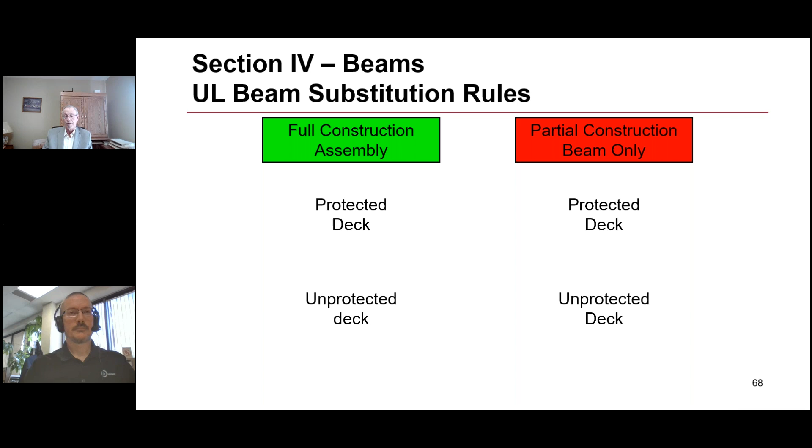Here's again a series of graphical representations of that concept. These come out of the handbook. So again, I'll encourage you to go to the handbook and read about this in more detail. Yes, you can substitute a protected deck beam only design into a protected deck assembly. You can substitute an unprotected deck beam design into an unprotected assembly rating. And you can go from an unprotected deck to a protected deck. You can go from a protected deck to an unprotected deck, but only if you do that 12-inch spray out on either side of the beam assembly.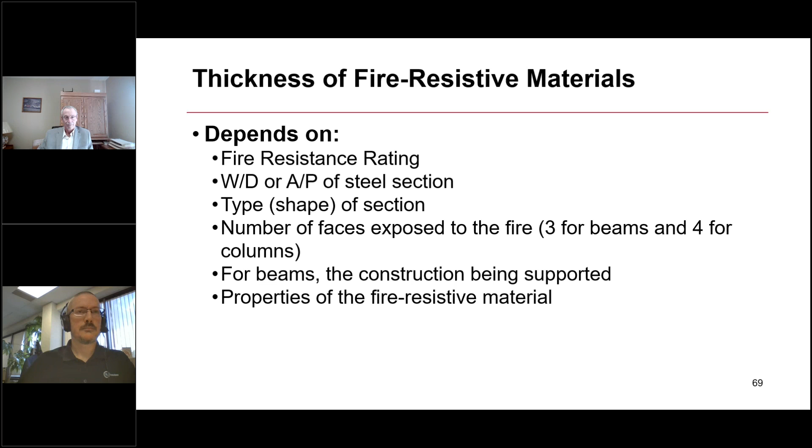Okay, so for wide flange steel, I mentioned massivity, like how big the steel is thermally. That's the shape factor, W over D. That's the weight of the steel, I think per foot, over the heated perimeter.

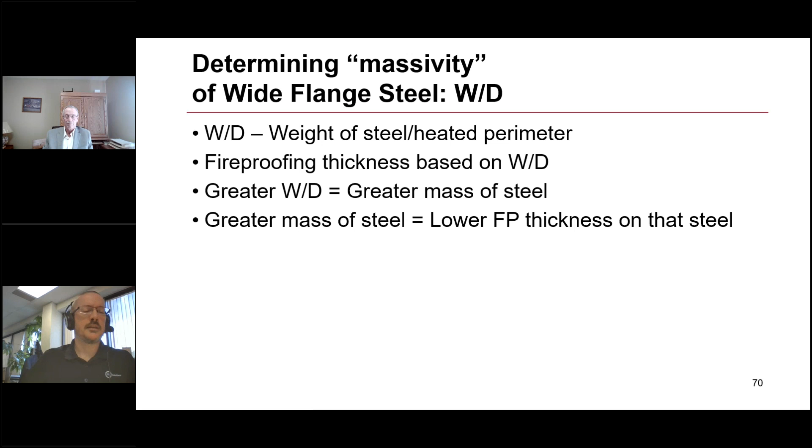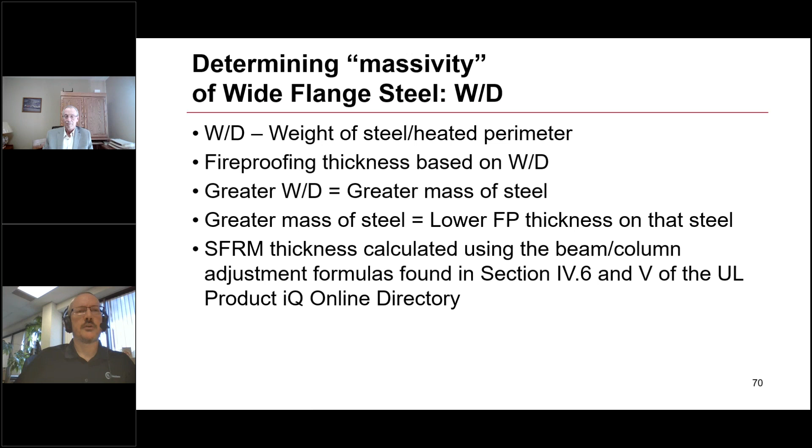So I mentioned the fireproofing thickness is based on that, because the greater the W over D, the greater the mass of steel, the longer that will take to heat up. And so if you have a really big steel size, you might not need as much fireproofing thickness on that, because the steel is absorbing a lot of that heat. And there's some adjustment formulas for SFRM, which we'll look at in a bit, for SFRM only.

So that was for wide flange steel. For hollow steel, tubular steel, circular pipes or square tubes or rectangular tubes, the term is not W over D. In the Imperial, it's A over P. That's also the shape factor for tubular steel. You calculate A, the cross-sectional area of the steel, so that's like your volume of steel, divided by P, which is the heated perimeter. What's the outside of that steel? So you divide those two, and then you come up with a number.

Same thing with the W over D, you come up with the number. So these you can calculate on your own, and they're also published. AISC publishes, in their book, pages that list all those W over Ds, and I think A over P as well. Likewise, the W over D ratios are published in the International Building Code in section 722, calculated fire resistance. So for code officials, that's an easy way of getting to that information.

Okay, so then just to dive into it a little bit, with the wide flange section, we've said W over D, that's the shape factor, W over D ratio. The W over D refers to the weight per lineal foot. So here on the screen, there's a W 8x28 beam, a 1 foot long section, whatever that weighs, that would be the W. And then the D is, if you had a string or tape measure you could conform all around that I shape, that would be the heated perimeter in inches, and you divide those two to get the W over D.

So what does that mean? The W over D is in all the column designs, the beam designs, it's in the BXUV guide. There are some thickness adjustment formulas that refer to W over D that we'll look at in a second here. Why is that important? There are two columns on the screen. One is a W 8x28 and one is a W 14x22.

Structurally, if you were to load these, which one is stronger? I'd have to look up the exact steel thicknesses, but I'm guessing probably the W14x22 would be stronger structurally. But which of these two is thermally larger when we're talking fire conditions? If you're not too familiar with the fire testing, you might think that larger column on the right, W14x22, is better under fire situations?

Think of it this way: if you pour your cup of coffee in the morning into a mug, there's a certain amount of time that coffee will stay hot. But if you pour the same amount of coffee onto a huge dinner plate, with all that surface area, that layer of coffee is now thin, you're exposing it to the air, and it's going to cool off a lot faster than the coffee sitting in the mug. So in the equation on the screen to calculate W over D, the bottom, 4A plus 2B minus 2C, is how to calculate the heated perimeter.

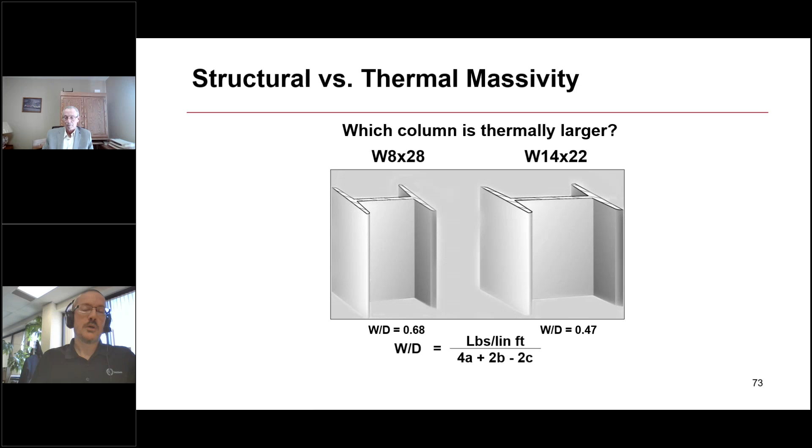All right, next slide. Okay, there's the answers there. The W/D of the 8 by 28 is 0.68, and the W/D of the 14 by 22 column is 0.47. So the larger the number in terms of W over D, that means it has more thermal mass to it. Like I said, these numbers are all throughout the directory, throughout all the designs.

They'll specify what that minimum W over D or A over P is, and any size steel with larger W over D or A over P may be substituted. I think that should say substituted with that same thickness. There are three ways that the W over D and A over P ratios are used. The first one, it'll specify what that minimum is. Some designs have an equation, make it really simple. The design is short and sweet.

It'll say the equation will have hourly rating, thickness of the material, and the W over D. And then the user has to plug in your hourly rating and your steel size per W over D, and then it'll tell you how much thickness is needed. So that's the equation. And then the third way, you might have a design that's pages and pages long, because it'll just plug in all the numbers into the equation and list out for every W over D, every hourly rating, what thickness is needed. That'll be in tabular form. Okay, next slide.

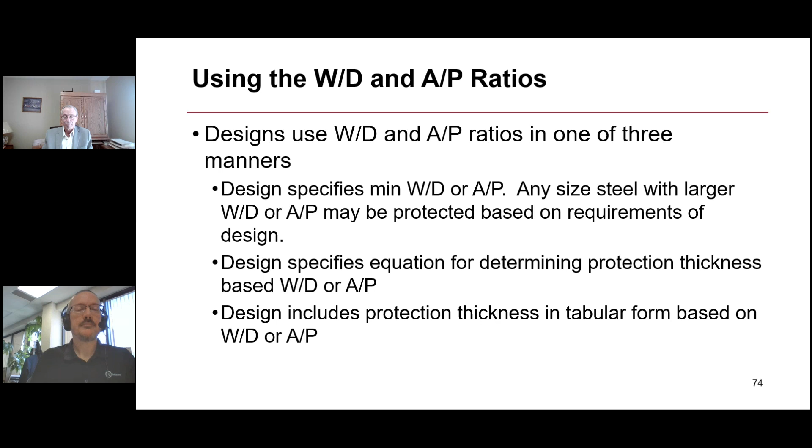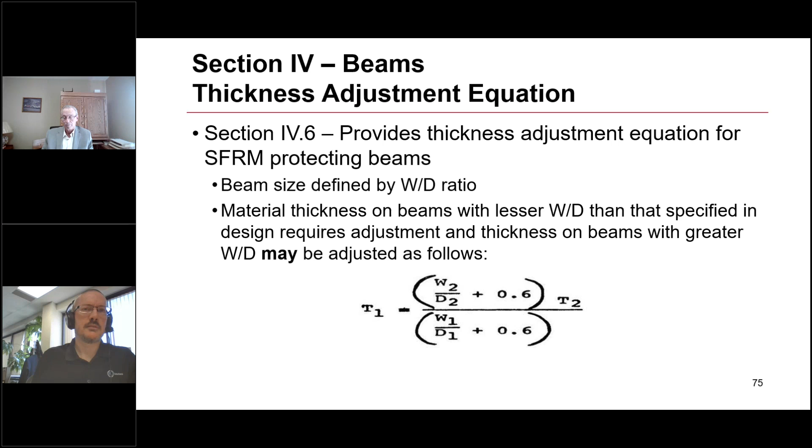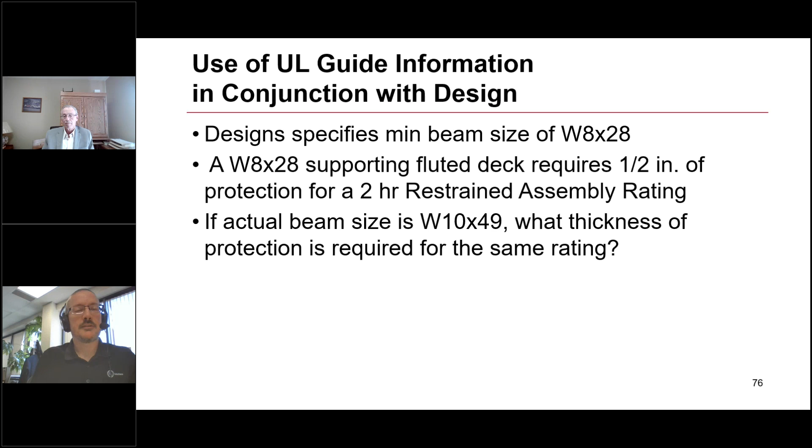Yeah, so you plug in there your W over D of the beam in the design, the 8 by 28, that's 0.68. The W over D of the beam that you want to substitute in, your 10 by 49, that's 1.02. And then that thickness that's specified for the 8 by 28, half inch, plug that into that equation there. You get a number, 0.395, and then the guide says you have to round up to the nearest 16th inch. So then that's 7/16 of an inch. So that's 1/16 of an inch less. So you save a little bit of material cost because that W10 by 49 is a larger piece of steel.

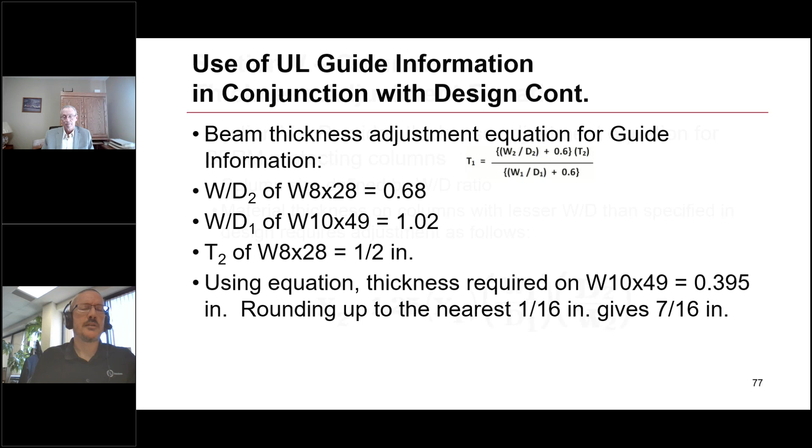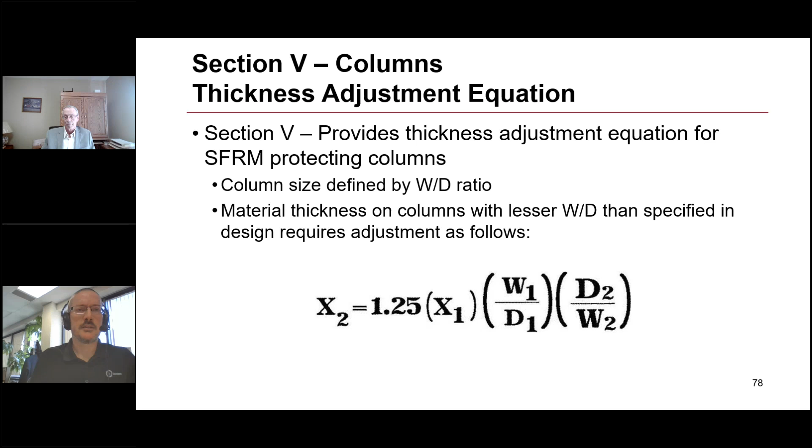All right, Rich, you got the conclusion here? Okay, just a very quick conclusion. Most UL designs are for a particular manufacturer's product. Not always. Some designs do include multiple manufacturers. UL designs are not interchangeable between products unless specifically noted in the design. Assemblies are listed in the UL Product iQ online directory, accessible at www.ul.com/PIQ. Those designs will detail the applications and installation procedures of the various materials involved. Those designs need to be followed as published, with the exception that you can make certain substitutions based on the guide information. So the guide information works hand in hand with those individual designs.